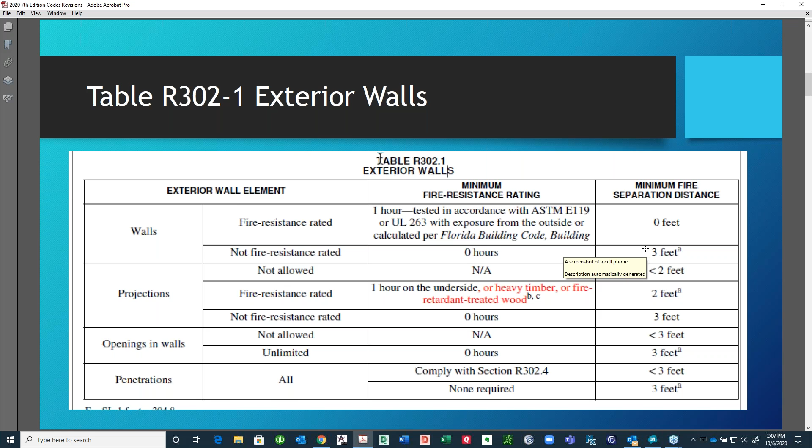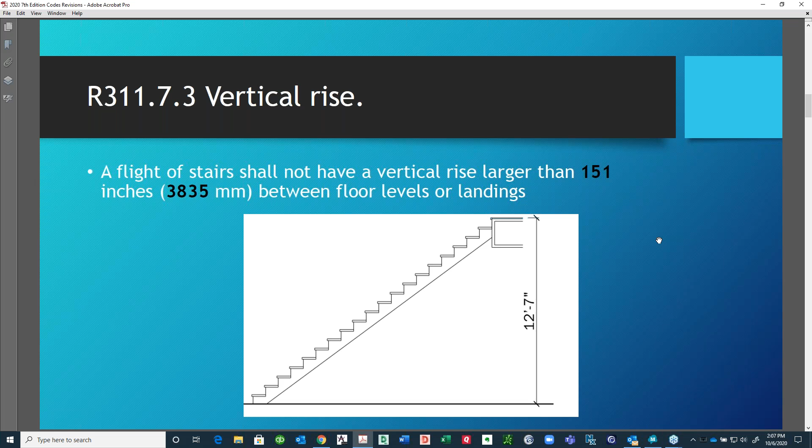This is a good one. Back in the 2014 code, we were limited to a stair rise of 144 inches. In the next code change they moved that to 147. Now they've changed it up to 151 inches, so you have 12'7" now from floor to floor to work with. That came through with the increasing depth of the floor systems, which will now let you eliminate the use of a landing that we had in the past.

Taking a lot of time, guys, if you would. I'm not going to get into it fully, but there's 3 pages on solar energy systems in section R324, which has been really expanded. One of the biggest things they're looking at now on your roofs is making sure there are emergency pathways for fire and rescue. If you have a 2-story over a 1-story, you have to be careful that the solar systems aren't blocking any egress windows. The fire departments are looking at that real hard. Roof loads for the solar systems are pretty light, not much more than your standard live load, but take a chance and look at that roof access and pathways that your building departments will be looking for.

Next, there's some clarification in the code. It used to be that exterior footings were measured from virgin grade, which wasn't really what the code said, but it was literally taken that way by a bunch of the AHJs. Now it's clearly noted that it could be from 1 foot below the finished compacted grade. That may help you guys if you have any issues with depth of footings and large depth footings. So there's a couple of good code sections to help us out.

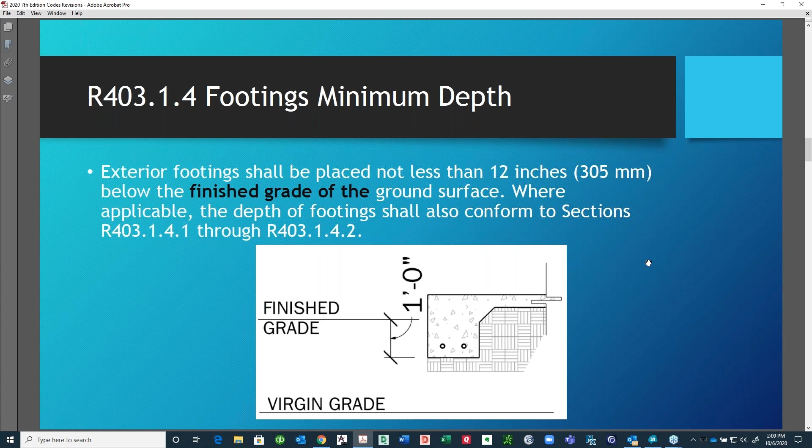Wind resistance to soffits: going to ASCE 7-16, you're going to find multiple areas now where in the past we used to have 3 to 4 zones on a house. Now we have up to 5. If your overhangs are more than 12 inches, you're going to have to look at the strength of that vinyl and may have to put in additional nailing and bracing through the bottom of your overhangs to attach your soffits to. They found that losing your soffits is one of the biggest issues with losing your roof when it comes to hurricanes.

The next one, regarding overhangs, is that no longer can you have an unsupported overhang on your gables of more than 12 inches. It's now down to 9 inches. If you want a larger overhang, you must use a drop gable so that you can run it back to that second truss and have a complete lookout rafter from there.

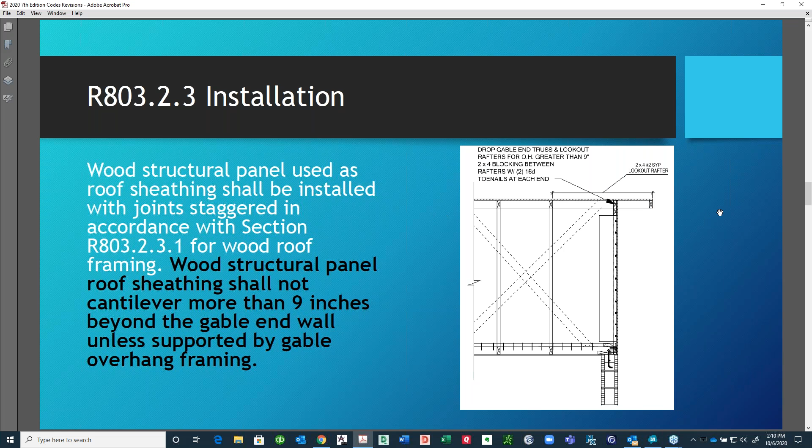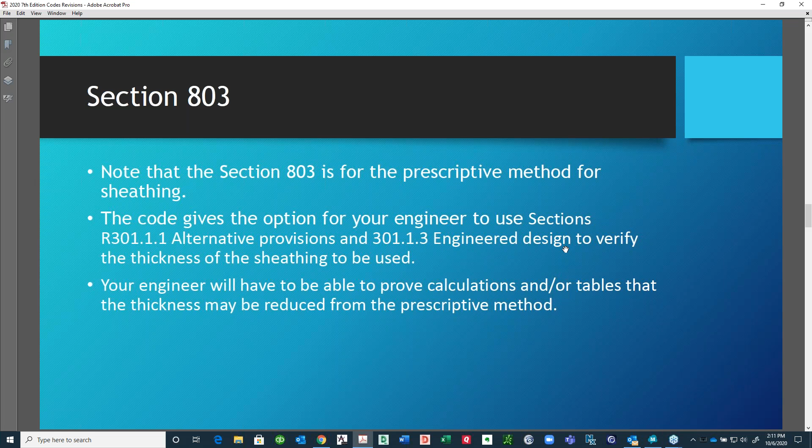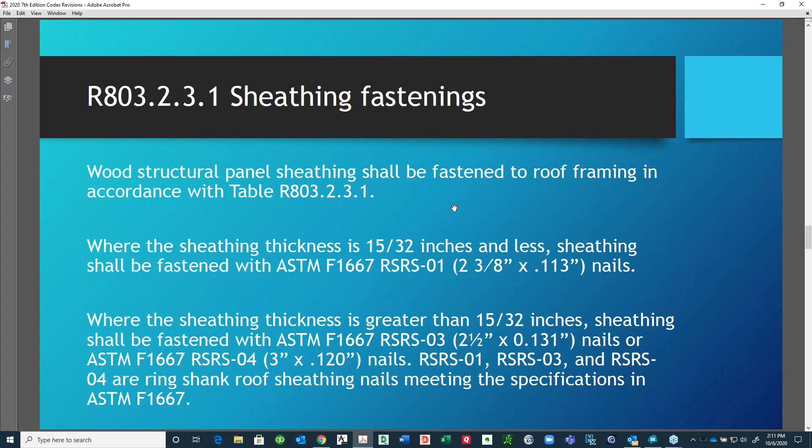Section 803 is the prescriptive method. This is where everybody's getting clogged up with the new code, because it's telling us what size sheathing we have to use now in different wind zones and wind speeds. Your engineer can use the alternative provisions in engineered design. Our group has looked at this over and over—we've probably put 80 to 90 man hours into trying to figure out the plywood and what we're going to be able to use across multiple wind zones. We haven't been too successful on that yet. Your engineer may be able to help you out. It also talks about the nailing, which has now changed, along with the thicknesses of the sheathing. So here's your major change in the prescriptive design.

If you're in exposure B, up to 140 miles an hour, you'll be able to use 7/16. I don't think any of you are below 140, but some of you may be. Up to 150 mile an hour, you'll be at 15/32. Up to 180, you'll be at 19/32. If you jump to exposure C, where most of our subdivisions are located, up to 130 miles an hour you're at 15/32, up to 170 you're at 19/32. And exposure D, you're at 19/32 at 180. So there are different types of ratings, as you guys know, with your plywood.

7/16 comes in an exposure 1, and it also comes in a structural 1. If you're familiar with your zip wall panels, you'll find that the zip wall is a structural 1 panel, so it's going to actually be greater than the 15/30 second panels that you'll find throughout. Really look at your ratings and work with the engineers on this, because if you're working with builders that are crossing over in wind speeds, they may have to use multiple different types of plywood to meet that current wind speed. We see this as an issue, especially with production home plans, making sure they get that right in the field.

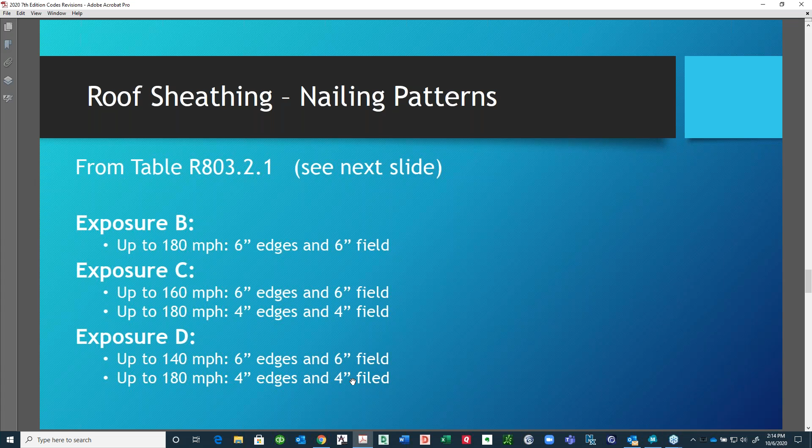So take a lot of time and really look at that section. Your nailing patterns are going to change. If you're exposure B, you're now going to be 6 on the edge and 6 in the field. Exposure C, up to 160 it's 6 and 6, up to 180 it's 4 and 4. Exposure D, up to 140 miles an hour, 6 inches on the edge and 6 inches in the field, and then at 180 again it's 4 inches and 4 inches in the field. This is again your roof sheathing attachment. You'll see in table 803.2.1 just what I told you on the other table. Make sure your plans are noted as such.

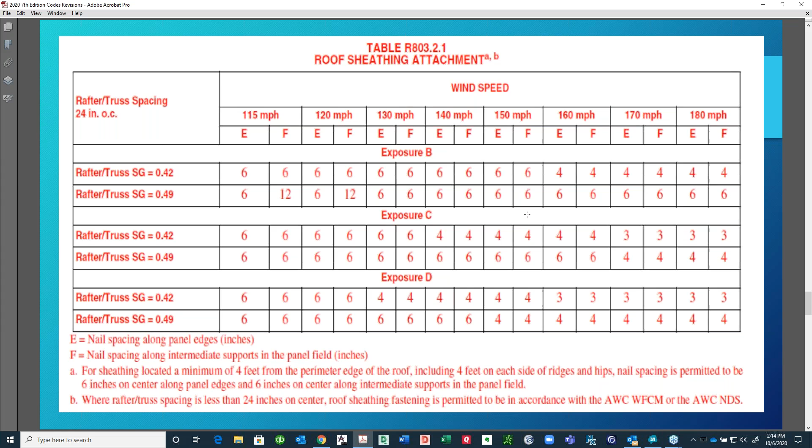Okay, on your underlayment - in the past we've gone through this with whether it's type 15 or type 30. Now all the underlayments are going to be required to meet ASTM D226 type 2, ASTM D4869 type 3 or type 4, and ASTM D6757, or a synthetic underlayment meeting the performance requirements. So now there are 5 different methods of protecting the roof deck. All this is coming from Michael and Irma, the last hurricanes, where they found most of the damage was coming from houses where once the first layer of shingles came off, there wasn't enough underlayment to protect the roof decking from leaking into the house. So they came up with 5 systems now.

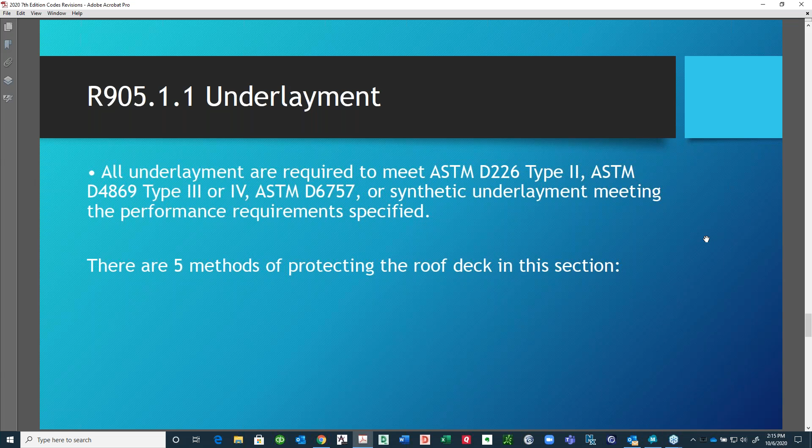Method 3 requires a minimum 3 3/4 inch strip over there, plus another approved underlayment in accordance with table R905.1.1 for applicable roof coverings. Method 4 allows just 2 layers of ASTM D226 type 2 or ASTM D4869 underlayment, or 2 layers of reinforced synthetic underlayment that has a product approval as an alternative to the underlayment.

The next one is fairly minor - most of you are probably already doing it, I don't even have it on the slide. But for your dryer vents, they can no longer be screwed together. They have to be mastic together and cannot be deformed. So they have to have a full 2x6 wall behind your dryers, or a direct outlet to the outside.

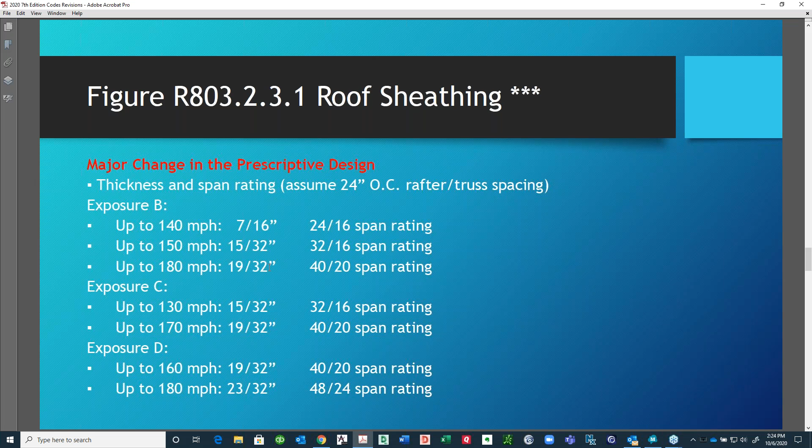Alexander asked if you could show the soffit page again. Did I have that soffit page? So, R704.1.

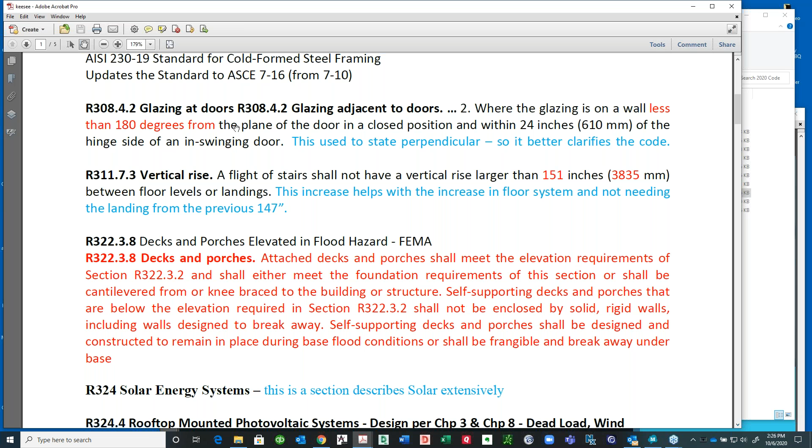A couple things we didn't talk about: the glazing of the doors. It used to say perpendicular, so it better clarifies it now. I don't know how many of you guys are working with decks and porches at a flood hazard, that was one of the changes.

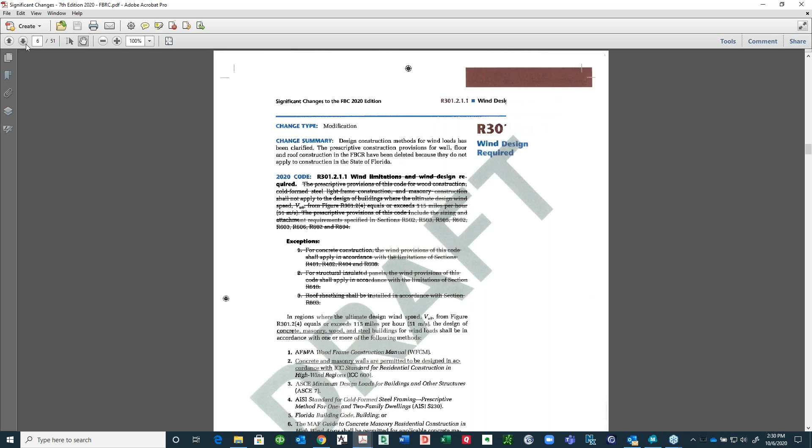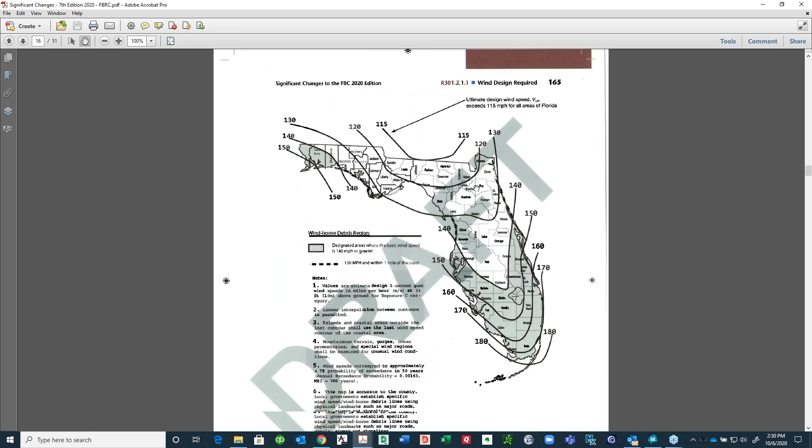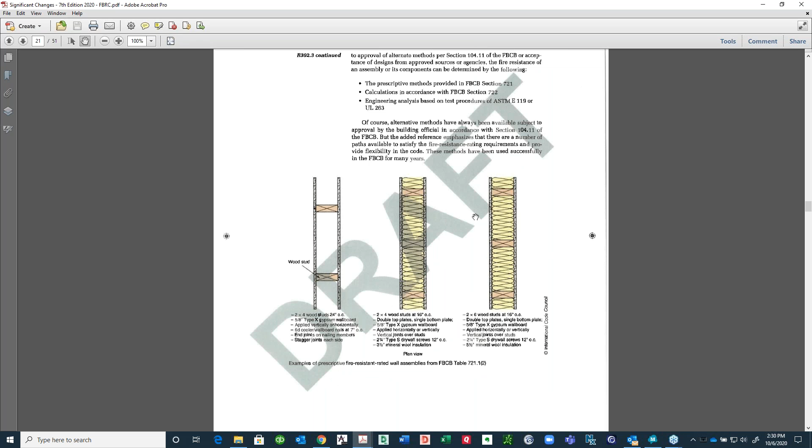The white paper you mentioned earlier, that's the one that's going to be $59? No, no. I can show you a quick look at it. This is what you'll be getting - I took out the residential code, this is the draft from ICC that we reviewed. It goes through all the crossouts of the code, all the significant changes coming through. It's 366 pages, it covers the entire building code, but 51 pages of it is just for the residential side. This is what you'll be able to get. The whole 366 pages will be available by the end of the month through FHBA or ICC.

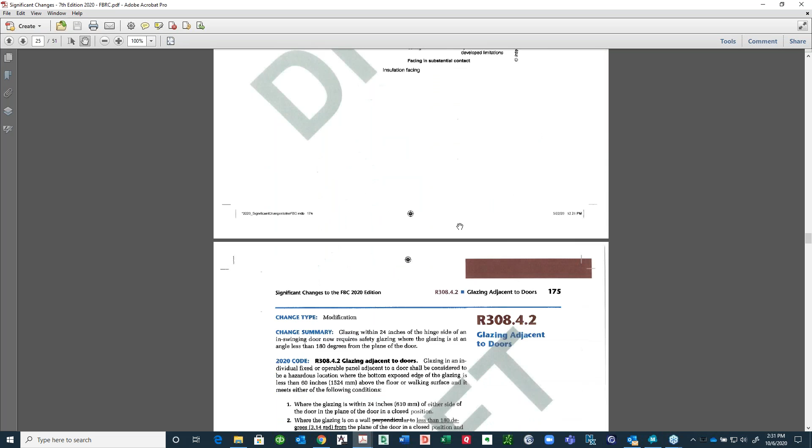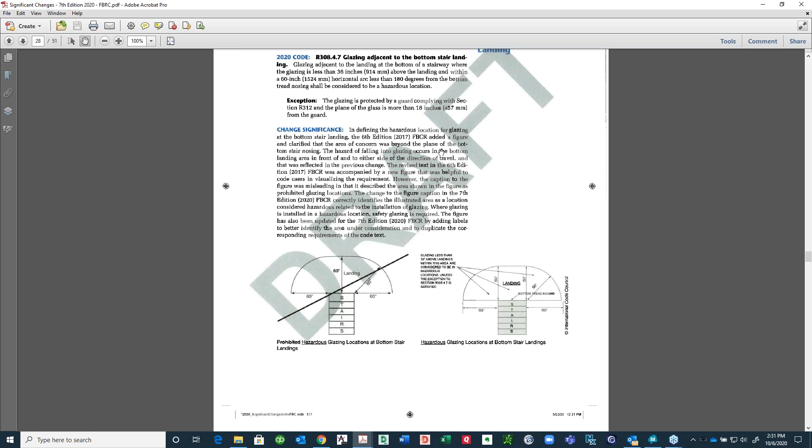George asked, was the total rise of the stairs the only stair change? That was significant, yes. They also had, George, well here it is - glazing adjacent at the bottom of the stairway. They clarified that a little bit better, so now you can have it, but you've got to have the glazing. It goes to how much glass you can have at a landing, and that sort of stuff. That's R308.4.7. That was really the other one. I just thought the height was a more significant change than the glazing side of it.

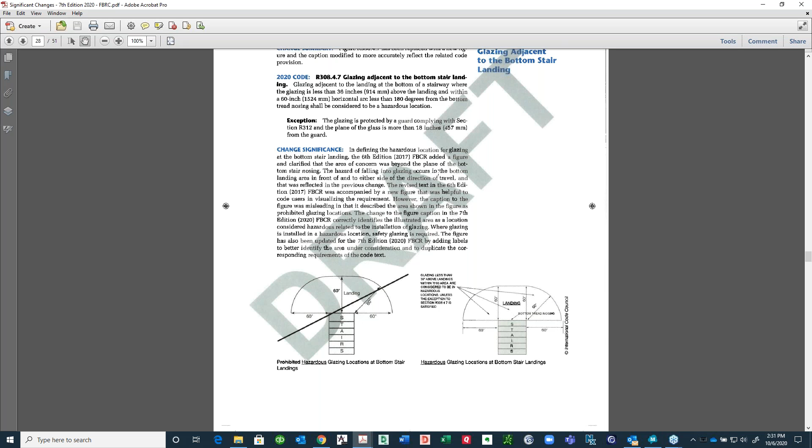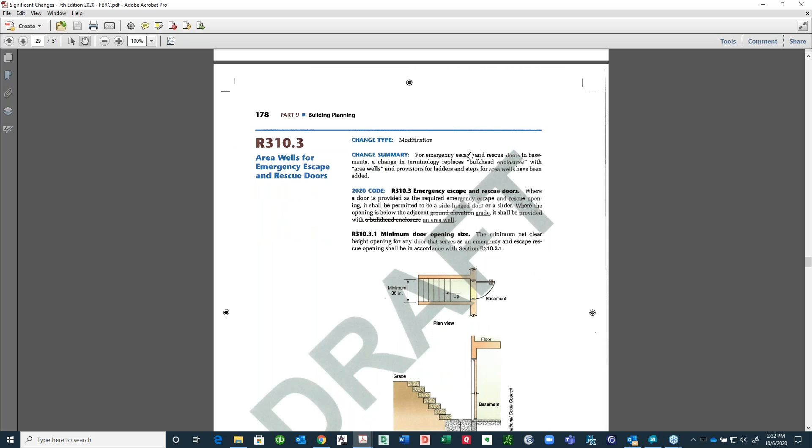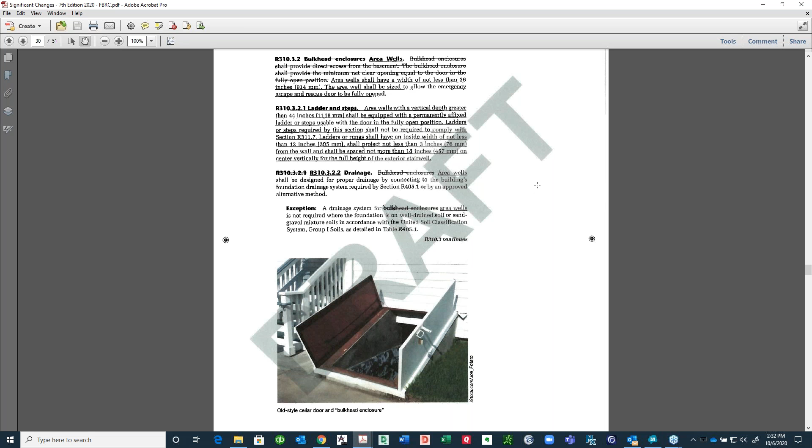Cool, got a lot more thank yous. And last call for questions. All right, doesn't look like anything's coming in, just a bunch more thank yous.

All right, well, thank you guys, and we look forward to sending this out to you. Just get with Danielle and we'll get this returned to you. If you have any questions, feel free to reach out to me or to Joe Belcher at the 411 code at fhba.com. We'd be more than glad to help you with any of your concerns. If you have anything, we look forward to working with you.